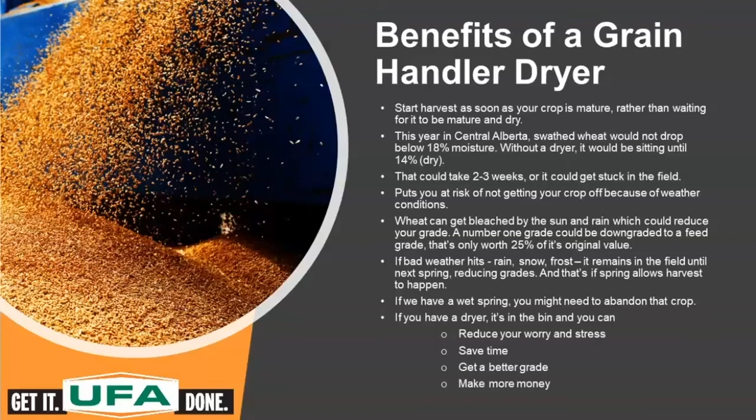So a couple benefits of having a grain handler dryer. So like I'd mentioned, you can actually start your harvest earlier, but during the harvest season, you can actually be harvesting later in the day, so after the ambient temperature reaches the dew point, and start earlier in the morning, or even run all night if the weather cooperates and rain doesn't stop your equipment. In some cases, a grain dryer can actually even replace a combine.

For example, if you have 3 combines right now and your moisture content comes up on your crop, you have to shut down all 3 combines. You have 0 harvest happening. But if you have a grain dryer, you can keep 2 combines running and your grain dryer, and you can continue harvesting. It might be a little bit slower rate, but you're still getting crop into the bin.

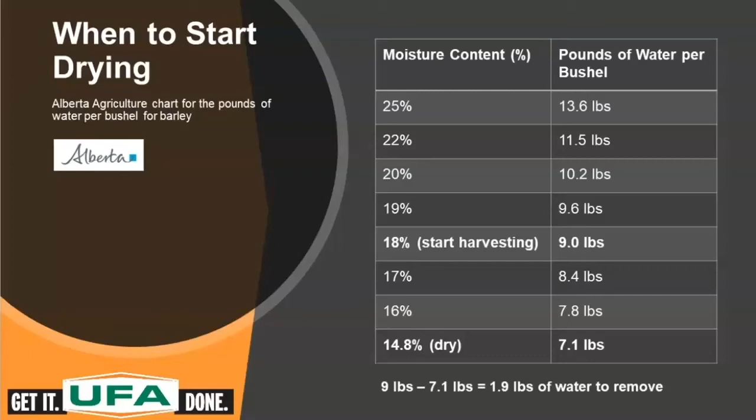So we'll look at cost of drying grain. There's a number that's assigned to all different types of dryers. And that number actually is an indication of the efficiency of the grain-air interaction in the dryer. This range is from 1,500 to 3,000 BTUs per pound of water removed. A grain handler dryer typically requires between 1,500 and 1,800 BTUs per pound of water. A typical cross-flow dryer requires 2,000 to 3,000 BTUs per pound of water.

So just a quick calculation on the difference. So 18% to 14% in barley, using an average gas price for August in Alberta, through a grain handler dryer, it'll cost you about half a cent per bushel. Now this is a relative number. On a cross-flow grain dryer, that number will actually be double.

Aeration for drying grain: at best, with perfect conditions and sufficient air volumes, the moisture content of the grain in the bin with aeration may be reduced by about 1%. Aeration really should only be used to maintain consistent temperatures in your grain mass in the bin. Next slide, please.

So, grain handler grain dryers actually have a fairly old origin. They are actually a direct descendant of the original Vertec dryers, which were developed in Vermilion in the early 80s. Grain handler actually acquired the design from Vertec and continued designing to this day on that same design.

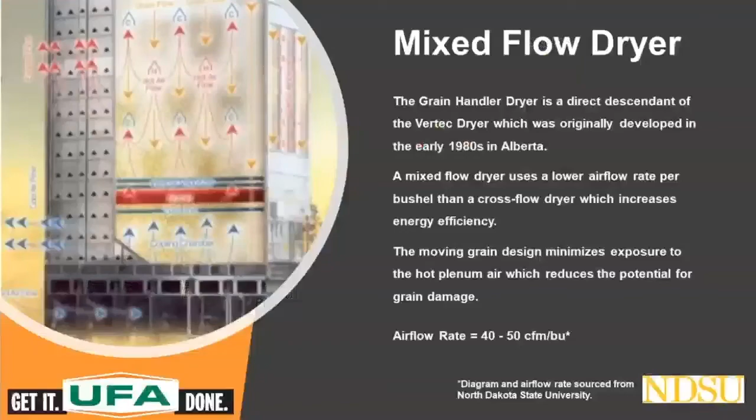You mentioned at the beginning that UFA had financing for these dryers. Can you give any other details on those financing offers? I'm not really up on the financing a whole lot, but I know one program that is available right now is no payments for 6 months on a dryer purchase. So that would mean you could get your dryer delivered today and not make a first payment until June. Perfect.

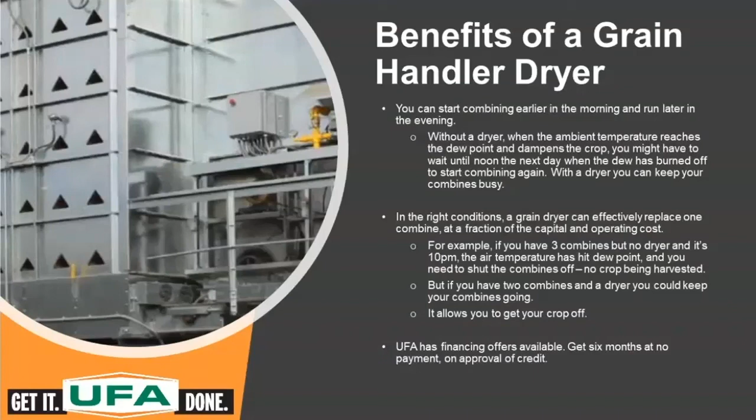There's a question about someone who has seen a unit on display at the Camrose store. Can you tell us about that unit? Which of those units is it? So the unit at the Camrose store is actually an 810. That one is set up as propane. It's the standard 810 build, so that dryer could be easily expanded to an 812 or an 816. Perfect.

There's just a note here. I just want to make sense of it. In the 820 single phase, how many amps is there? Okay, so we can do an 820 in single phase. I'd have to calculate what the full load amps are, or full load requirements are for an 820. But that's something I can easily do.

Do you want some time to do that? Because I can also, after this session, give you this person's name and you could get back to them directly. I can do that fairly quickly here. We can go on to the next question. I'll just open up that calculator. Okay, you bet. So just looking through the questions. Okay. One quick question is, and I don't know if this is true, but wow, we're getting lots of questions. So I'm just trying to make sure that we don't miss anything.